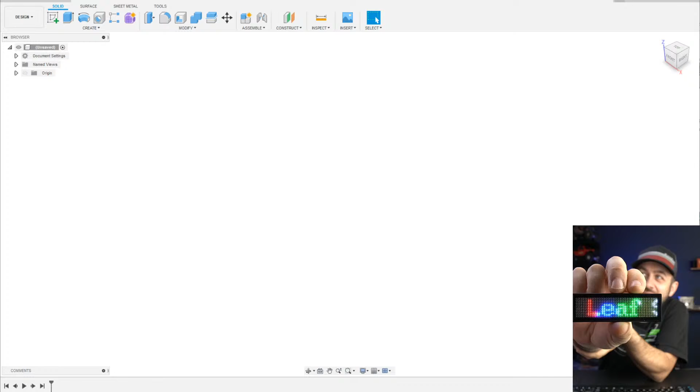And one other thing that I wanted to do. If you guys remember, I had this, it's a digital name tag actually. I had it for one of the Scale Nationals builds, and I was going to use it as my tailgate on the Class 3 build. But anyway, I want to use this as the marquee above the skee ball machine. I linked to where I bought it on Amazon as well. And that's going to be the plan.

Yeah. Constraints are important. So let's get into drawing this thing. I think we should start with the side profile, even though I'm choosing the front plane. So a couple of things. I looked up some basic dimensions of these things.

Normally, these are 10 or 13 feet long, and that's too big for most people's 3D printers to try and make these to scale. So we're going to shorten it, go with a stubbier version, but I think it'll be fine. It'll still give us the look. And then the width, they're usually about 32 inches wide, and I want to make sure that I can fit this as a marquee. So I think we're going to be pretty close on width for scale. Those are a couple of things that I want to keep in mind.

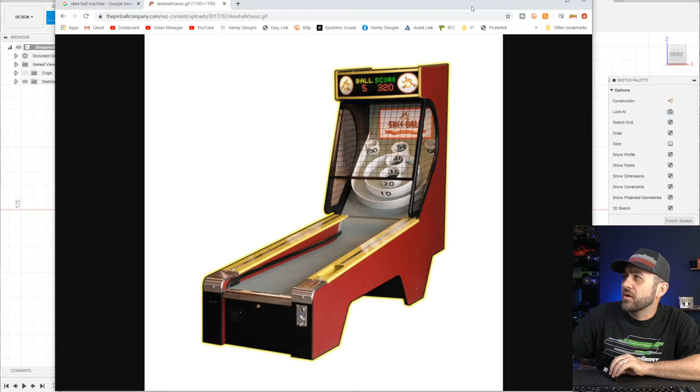Okay, 220 by 220, 225, 235. Okay, so 220 is the one. I want to make sure that I don't have anything bigger than 220. Thank you guys for that. I appreciate it. It's good info to have.

So we're going to start with some constraints. Now, the origin point is important. It's helpful to think about where you're drawing around that, but with a skee ball machine having all these sloped surfaces, it's kind of odd to try and define an origin. So I think what we'll probably do is choose this bottom corner and draw off of that.

So again, hotkeys. I try and call out my hotkeys as I can. Instead of going up here, clicking line, I just hit L for line. So we're going to just start with some basic sketching first. Looking at the photo, making some choices. And again, I'm drawing this too small right now. I can tell already.

What is 220? What is that, like 9 inches? 8.66 inches. Is that big enough? We're gonna make that the overall length, so we can print these entire sides as one piece. So, okay. That is good information.

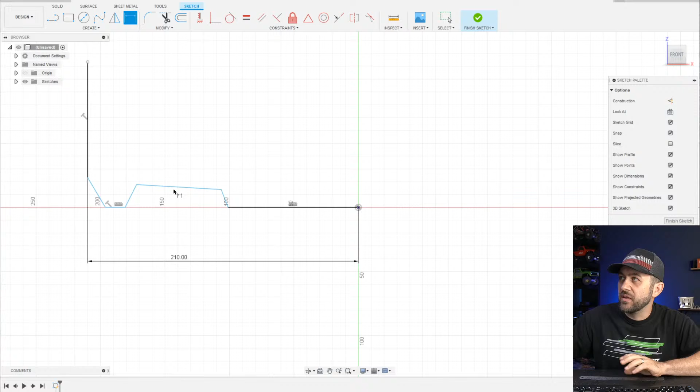So D for dimension. We're going to go from the origin to, this will be the back side. Let's go 210 millimeters so that you don't have to be right to the edge of everything. And so since we have that,

now what I don't know, I wonder if I can find a skee ball machine side. Just going to see if I can find a photo that I like to get the proportions of length versus height, because we can just bring a photo in. Side view. This one gives us some, it's kind of a cheap looking skee ball machine. Oh, what do we have here? How convenient is this photo?

84, what's that say? So this one is 84.125 inches. That's a short machine. Okay. If we just tally up the total height on it though, 15.25, 46.25, 16.25. It's about 75 or 78 inches tall divided by 25.4. Or no, oops, not divided by.

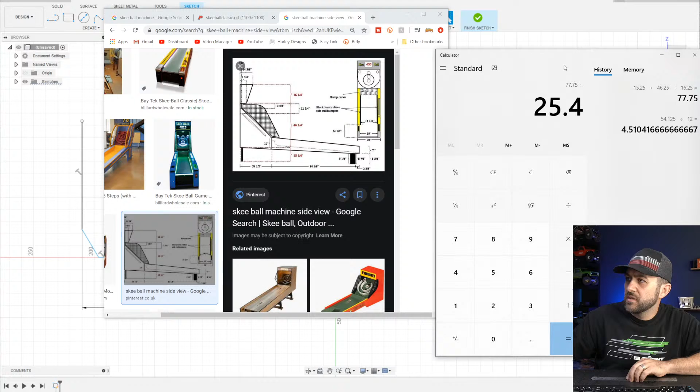So if we take that times 25.4 first, and then divide that by, okay. So the skee ball, 85. Jimmy just gave me the dimensions with the 30 inches wide, 85.5 inches tall. So if we just do, it's still pretty tall. Okay, we'll figure somewhere in there.

So let's D for dimension, grab our overall height, just trying to get us in this range. It looks tall, but let's start with that. If we define our dimensions early, we can always go back and change things as we like. The great thing about CAD, right?

So this line here where I'm drawing, that's gonna be the marquee area. So we need to make sure that it can fit our, so this thing is about 30 millimeters tall. So let's make sure that this here is 45, I think is a decent number.

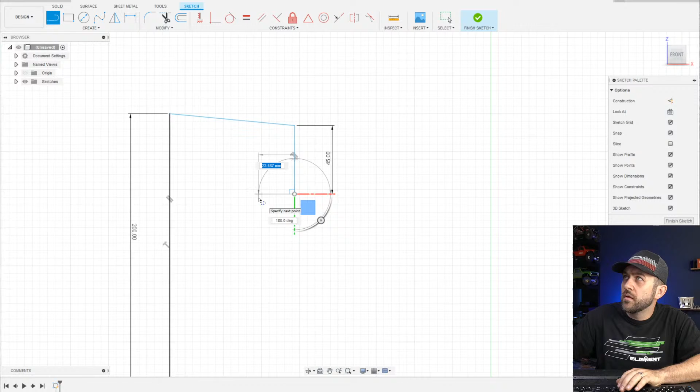So this is going to be our side rails. And then we need an arc. So now I just drew these lines. Now, right here, if I wanted a constraint, I could select these two lines and do a tangent, but I actually don't think I want to. I think I'm going to leave that kind of as a sharper point, and then I'll do a fillet later.

I think we do want to get this closer to the back. This needs to come down. Let's define an angle that we like. So I don't know. The side angle is taller than the actual slope.

Are these designs more geared towards FDM than resin? Generally, they're more geared towards FDM just because those are the more popular and more common printers. And resin printers, most of the ones that are the most common for consumers to have, are also a little bit smaller. So again, generally, yes. I have a resin printer as well, or have access to it. It's the one that we have at the shop, but I use it more for detail type stuff than anything, nothing that needs much strength.

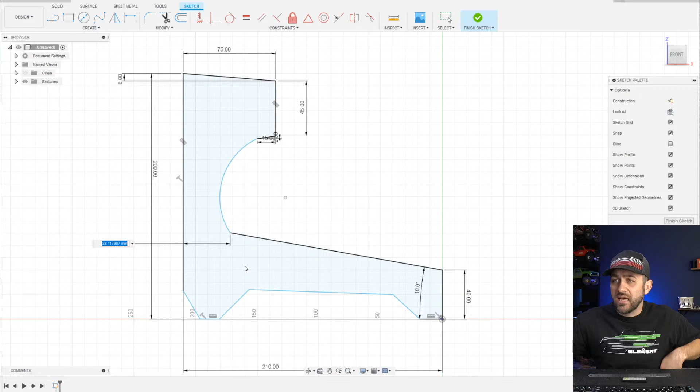So let's try and rein in some of these other dimensions. All these dimensions here, I'm just kind of picking these things out of nowhere. I'm just making a sketch and kind of going with a gut feeling. Oh, I see something I don't like. So I'm looking at this photo still that I had, and I'm just kind of trying to pull some of these.

So we've got the sloped sides of these rails. Then we've got this section here, and I feel like this is a little bit of a straight line, and then it goes into a curve towards the top of that marquee. So I'm gonna do that. And one thing I am going to do is select that arc and that other line, and make those tangent so that they flow into each other. I think that looks a lot better. Bring that back a little. No, I'm going to take it the other way.

How big is that LED name tag? It is 30 millimeters tall, and it is about 93 millimeters wide. So it's going to be a little bit wider than the actual scale width proportions would come down to, but I think it's kind of just a cool touch that you could add if you wanted to purchase it. And if not, we'll just have a panel there that would fill it instead.

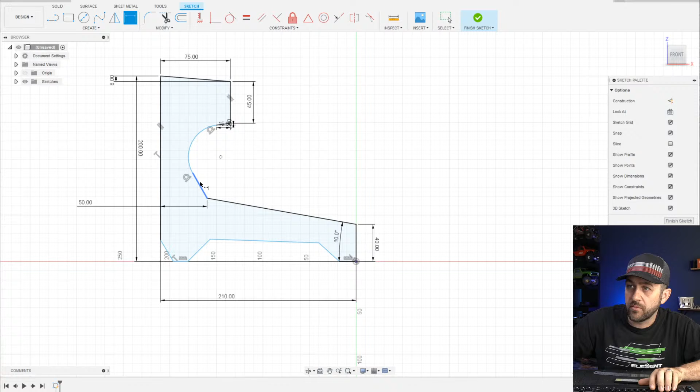So I'm going to make sure that we have a few other constraints. Now, you can see all these lines are black all the way around except this bottom, and that means these are all fully defined. So we have enough dimensions on all of those that it knows exactly where they should be. These ones that are still blue means that they're not defined yet. Ideally, you want all of the lines in a drawing to be defined. So these are blue, so I can still just click and drag them around. These black ones, I can't. I can click and try and drag, nothing happens because they're defined. So always try and shoot for a defined drawing if possible.

We're gonna go closer to 60. Stand that up a little bit more. Do a complementing angle here. And we'll match it on the back side as well. Let's take a look at this. What's 5 degrees look like? This angle here is what I'm gonna make the actual skee ball ramp area, the area that the actual ball would ride on. I'm gonna try and match that. I feel like that angle's a little steep. 4 degrees, I like it better.

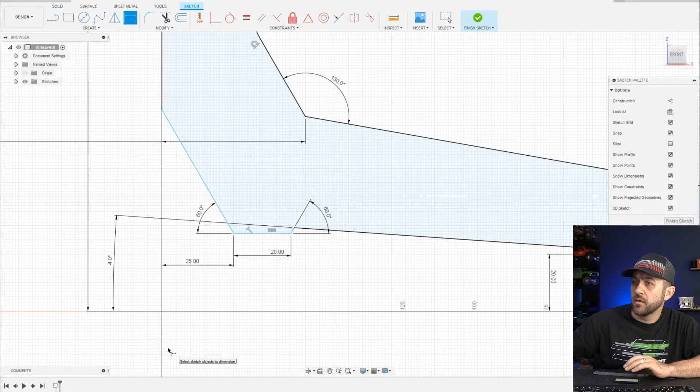So another thing with constraints, now you can see how this line went way up in the air there. So if I select that one there, go down to the front side, select it. Up top, there's a collinear constraint. Click that, and it just means that those two are going to be in line with each other. That's what collinear means.

How about instead of 3D printing scale accessories, we just build a shrinking machine, and with as much time as we spend on here live, it probably would work.

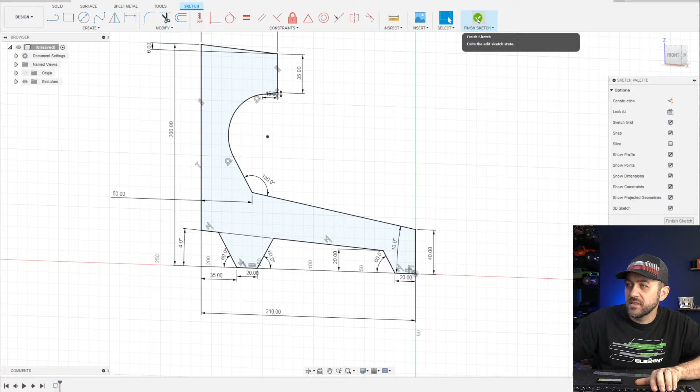So I'm gonna select that. Can I do an offset here? Start, yeah, offset. So the reason I want to do this is I want the origin to actually be in the center of the actual machine. So I'm gonna do an offset here. Like we said before, this piece here is 92, and we added 5 on the marquee, so let's add 5 on the side. So we'll go to 97. But we need to do half of 97, so 97 divided by 2.

And then we'll select that distance. Let's go 2 millimeter. It's not very thick. I mean, it's pretty thin, really. Let's go. I feel like 4 is getting too thick, but let's try that. How many pieces will this be for printing? I have no idea yet. We'll see.

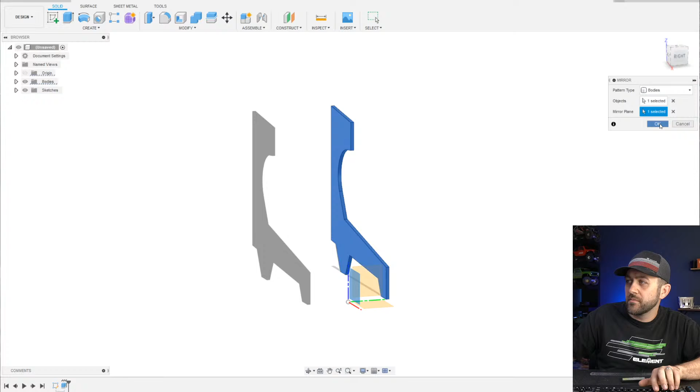So we have that there. We can clean up things later as we like, but this is going to be a start. Taper it. Why would we taper it? I don't see why we would do that. So now this is a body that we'll want to mirror. I don't know if we want to do it yet or not, but let's just do it for now. We can always undo it or change it, but that's kind of what our initial framework will look like.

The reason I say I don't know if I want to mirror it yet is just because I want to add bosses and tabs and things like that to this piece that are going to copy to the other side, but for reference now, at least we'll add it and see what it's like. So here's another thing. Like exactly this. I made this just a thin piece, and we still need to add all kinds of width. I want to add this whole portion, this top rail. I want to try and make this side piece as substantial as possible, and incorporate it, minimize a lot of the extra stuff that'll need to be done or attached.

So let's add, let's go 10. Doesn't need to be too big. Add the radius around the front. I think we can get away with some of it. We're gonna add a new sketch on that side plane. I am gonna turn off that second body. We can delete it, redo it later, but just turned it off for now. So we're gonna flip the offset. We're gonna go 3 millimeter, flip it again.

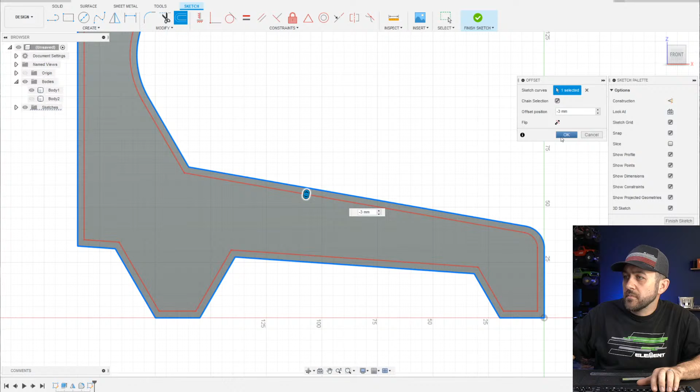And we're going to do from this corner a perpendicular line. How much? I'm going to just bring this to the front for now. We may add more framework later, or we definitely will. But for now, what I'm looking at doing is I want to add this lip. We have 4 millimeters of side already, so let's just add. Let's look. We have to do some math.

So 4, I need at least, say, 7. That's 11 millimeters total. And then I need another wall thickness. Let's say we can go down to 3. So what did I say? I'm going to take that outside from 4 to 3. So 3, 7, and 3 is 13 total. That's what I need for the distance here.

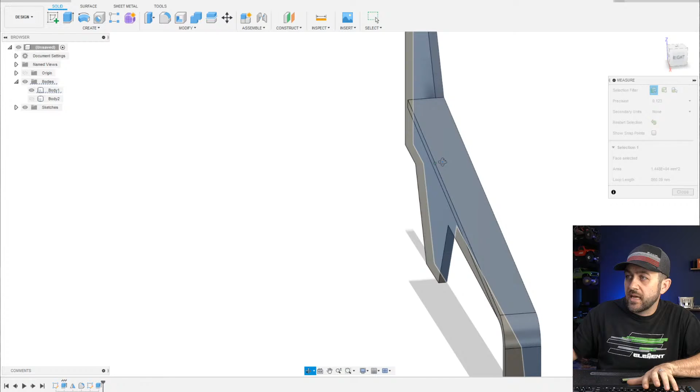We're going to change that first feature to 3 millimeter. And then that extrusion that we did there, I just need 10 millimeters total. And then if we hit the inspect tool, I can show you. So from the outside to this face, you see there's that 13 millimeters we were talking about.

Yes, this is an ambitious project. I am going to try and go through this as quickly as possible. I may have to talk more, read chat less on this one, so I apologize for anybody whose questions I ignore.

Let's just do well, it should be -7 millimeter offset. And we can delete a few of these lines. I could have just projected that and grabbed that, but it's fine.

I'm gonna make that internal shelf, whatever you want to call it, where the skee ball is going to travel down.

One thing we're gonna have to do is it's going to be a little bit difficult to take these things out of here, so we're gonna have to define where this point is going to be. Maybe we can, if we do something like... even, I have another idea. Let's do...

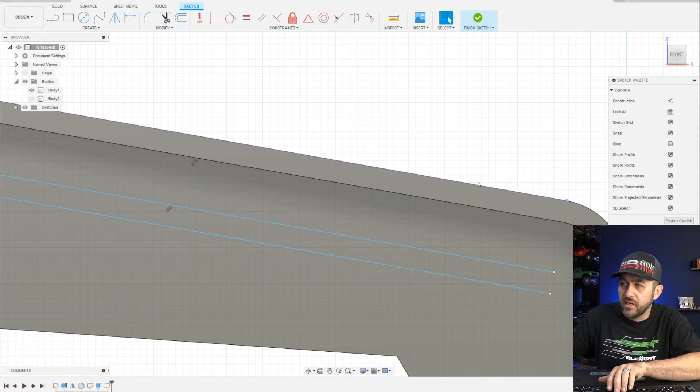We're gonna hit P for project, click that outside line to convert it to bring it in. Now I'm gonna do something - I'm gonna do a vertical line, and then we're gonna do another sloped line.

I'm gonna hit C for circle and draw a circle that is 6.35 millimeters. That's gonna represent what my ball bearing will be. And I'm gonna make that tangent to that line. This is just a construction line for now, so I can see.

I think what I want to do is give this thing a kind of exposed look. So what I just did there was define a 2 degree slope so that the ball bearing still wants to roll downwards, but it doesn't have to be too aggressive. The whole point is this ball bearing will be able to come and expose itself a little bit at the end, so you're not reaching down to get it.

Again, like somebody else just mentioned, this is ambitious. I agree. So let's define some distances from where all this stuff needs to be, and try to bring that thing closer to the end.

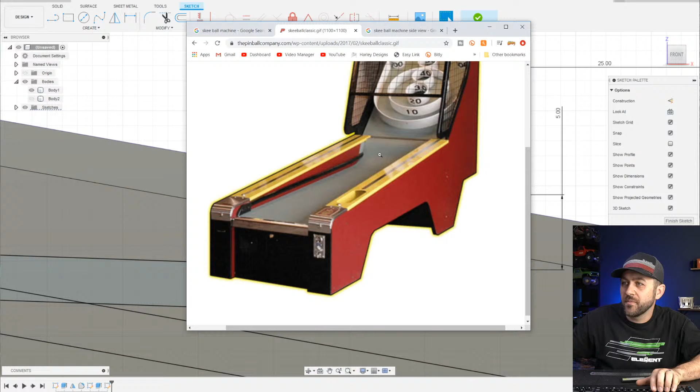Hit P for project. Now I'm just pulling things in for now. We're just going to think and build as we go to try and make this thing functional. Let's see if we get there today or if this turns into a multi-week project.

I think we're going to be able to get it done tonight, but okay, just going to do that.

I'm going to do an offset. I'm going to unclick the chain so that I can only select the lines that I want, and I'm going to offset these 7. Now I can see where technically I'm going to have that interference.

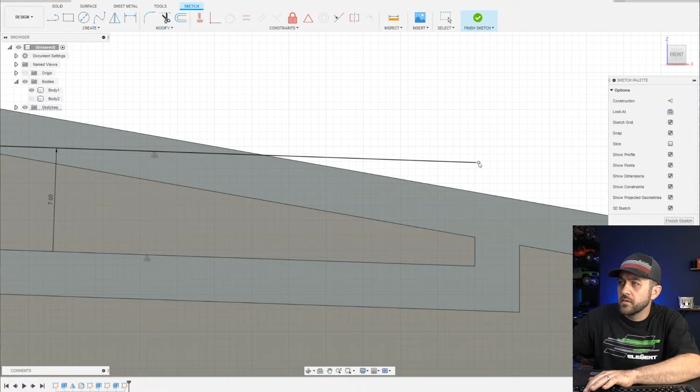So the reason I did that is that now I want to make... oh, there's some... I'm going to make a cut here so that, and we need to make this -10 for now.

So now I know exactly where it was interfering. I can go back in and clean up the cut, make it look how I want in a bit, but that just gives me the mechanics of it for now. We'll work on making the rest of it right later.

We're going to have to make sure that as we're thinking about this, I want this thing to print well too. So some of this area, I'm going to have to make sure people know you're either going to have to print with or without supports, and we're going to have to think about how that's going to work.

So, you know, if I try and close this whole thing off, this small of a gap, it's going to bridge just fine. It's just things like that we're going to constantly keep in mind, make sure we try and get this thing working, functioning properly by the time it's done.

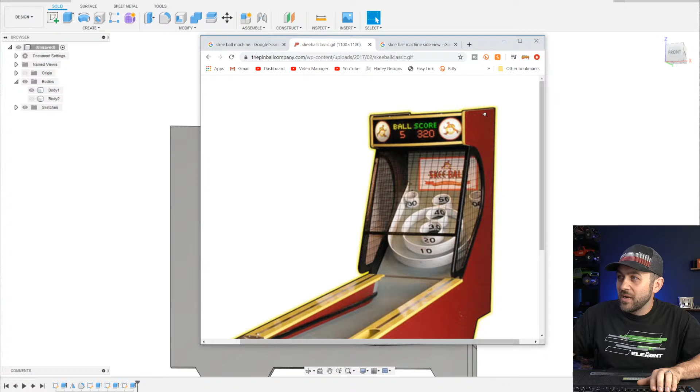So we've got small radiuses on the corners is all, nothing major. We already got that radius. We need to do a couple of these cleanups here, make those feet look proper, only on the inside though. This is definitely going to be a multi-piece, no doubt about that. I'm just trying to keep it in a reasonable amount of pieces.

We're going to clean up some of these corners as best we can. We're going to leave that back bottom one. I can't do it. We're gonna clean that one up too.

Small radii up there, okay. I don't like that one. I can't undo that. There we go. Let's put a 3mm radius on all that.

How deep is the lane? That I don't know yet. Here's something we should do. Let's save it. All right.

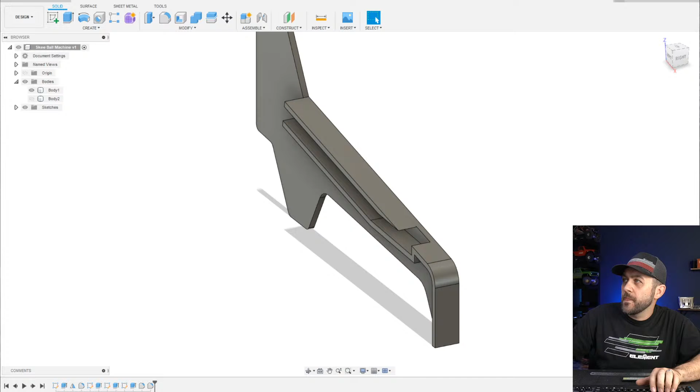Okay, now we need to... so one of the things is like I drew all this internal stuff that isn't on the other side. You don't have the ball return on the left side too. So some of this needs to copy over, but some of it doesn't, which makes it a little bit difficult, but we'll figure it out. We're getting there. Or we will get there. We're definitely not getting there yet. That's for sure.

So, okay, let's work on how we're going to close this in and make this printable. Because that's going to be interesting. Yeah, they don't match. This one I'm not super worried about yet. I feel like we're gonna end up not using that body.

We're gonna kind of copy this one over and redo a lot of it. Can't you back up the drawing and mirror it before? Yeah, I could, and that's definitely something. But I feel like we're gonna add so many other tabs and bosses and all that kind of stuff on this thing that's gonna be some.

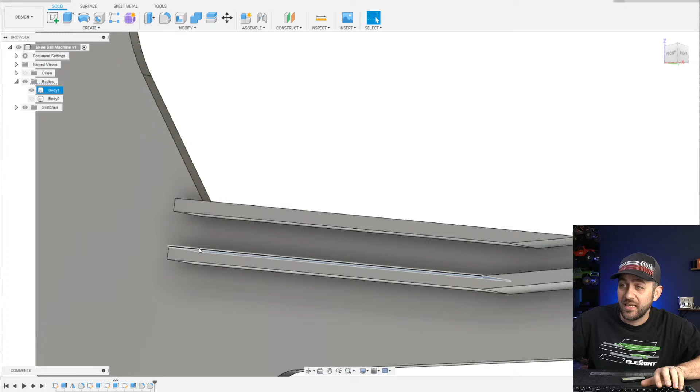And I was kind of thinking about that, but what I'm worried about is the lane's going to come all the way over this, and I'm going to have some area that I'm worried about printing properly. But maybe we can add a couple of additional supports, and I think that'll work.

We're going to try and design this to print as good as possible. And I think I know how, because I want it to print without supports on this so that this ball return stays unobstructed.

So we need the lane. The lane, we need it to start at the very, very front. Let's start it at that radius return. And it is going to be flatter than the top. Oh, and we decided that we were going to make it parallel to this bottom edge here. So we're going to hit parallel. So that does that.

Now you see, we end up with a fairly deep portion of the lane down here towards the ramped section. So I am looking to make sure that we have that. What I'm seeing here, though, is that I think we're way too deep. And that means that I need to increase this bottom angle, which I'm going to hit Finish Sketch for.

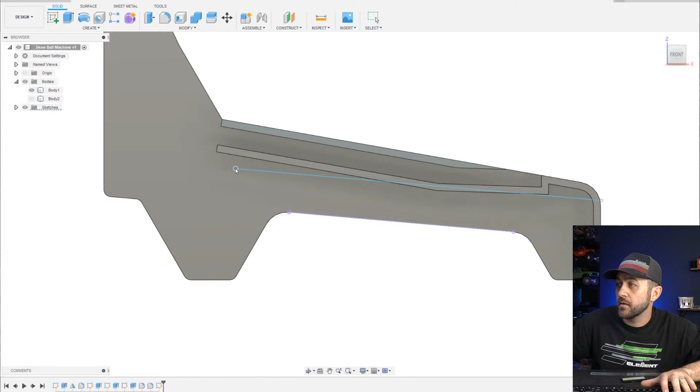One thing, let's just start with something. I still think that that's too deep up here. Don't you guys?

Let's go from 5 degrees to 7 degrees. That's almost looking too parallel. 6, is it going to be all right?

I'm going to hit P for project. I'm going to grab some of that line work. We're going to... okay, I'm just going to constrain some of these lines so that we know we have enough. I think that's looking better.

Phoenix, just fair warning, I'm working on an SCX 3, which may have driven me to drinking.

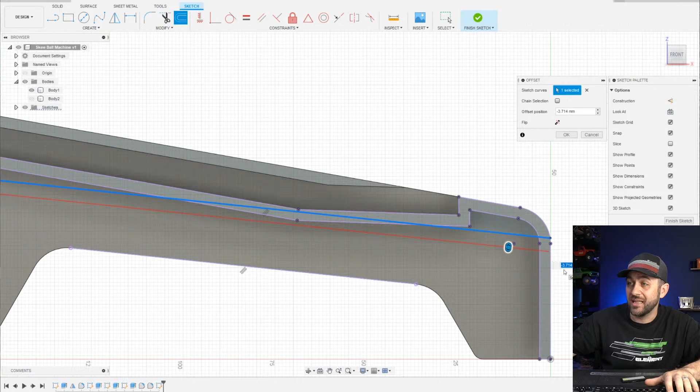So that's gonna start our lane. I feel like we need to make sure our lane has some decent thickness to it. So let's go. Well, we're not actually putting in the full lane, are we? We are just making sure we have a base for it.

So we're going to go -4. Is that going to be 4 millimeters? That's plenty of material for 3D printing. So that.

Now let's start a little bit of the sketching of our arc. I froze. Looks like I'm still moving on my end, at least from what I'm showing is sending. Maybe refresh your feed.

So I grabbed an arc so that we can start looking at the ramp portion. So I drew that arc. Now I'm going to hit L for line, X for construction, and draw a little bit of a line, making sure that it's tangent to the end of that arc, because I want to see where we're going to be throwing the ball bearing into.

The ramp on the actual skee ball machine looks pretty abrupt, but we're going to define off of this random point out here where the ramp portion's starting. 15, and then...

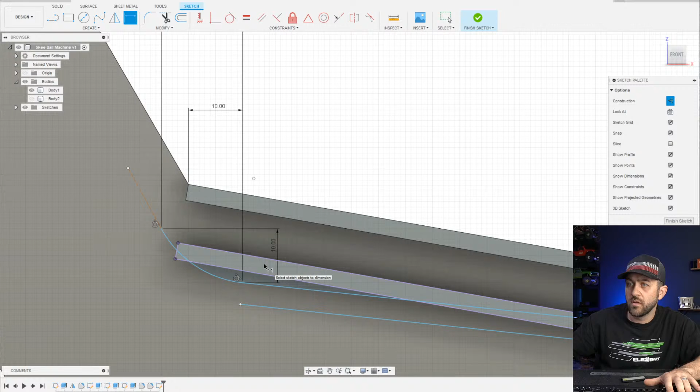Throwing some dimensions on there. That's just going to give us something to work with at least. 33, is that enough? Go up. Throwing the ball bearing to the moon comes to mind.

All right, we're going to be, I think that's looking pretty okay. Yeah, I think we're looking all right at this point. Now, again, this is looking a lot like what the whole ramp section is going to be, and maybe I'll use that a little bit.

Yeah, maybe we're going to extrude this as the ramp section for now, and I'll show you. You need to make sure that we have all the areas we need selected. Oh, let's...

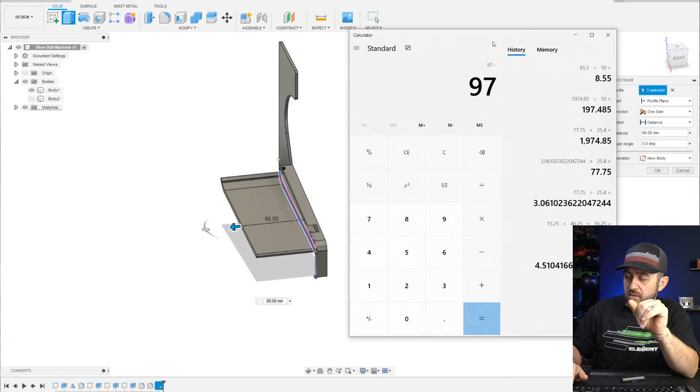All right, we're going to leave this as a new body. We're going to expand this. Now, we had defined our total width previously at 97 millimeters, I believe. So we were at 97 millimeters, and then we were going to have 13 millimeters per side rail. So we need to subtract 26 from that, which means we need 71 millimeters on the inside portion. So let's just go 71.

And we're going to say new body for now. One thing I'm going to do, oh, see, we missed a portion of our profile.

It curves up at the end of the side rail, it curves up at the end of the side rails. See the picture. Curves up at the end. Yeah, I see what you mean. You're saying, well, it kind of ends towards the end of the side rails, which is similar to what we have, but...

Oh, sorry, I don't have that up there. You know, like it kind of ends prior to it. So I do see that mine's a little bit past that, but we can possibly adjust that, but we'll see. This is all kind of loose at this point.

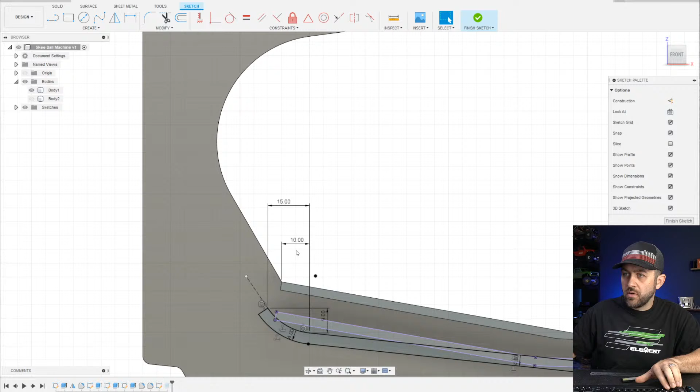So I mean, if we want to go like, whoops, no, wrong one. We need to take the, say we want to do that one and move it like 15. I know it kind of goes higher as well, which, let's go 18 millimeters. And then we're going to convert this from a construction line to an actual line. Get rid of that then.

And then yeah, it's got kind of like a rollover as well at the... so let's see. This line, let's play with some things here. 20.

So we'll take that to 24. Can we push this to 16? Yeah, pretty close. Okay.

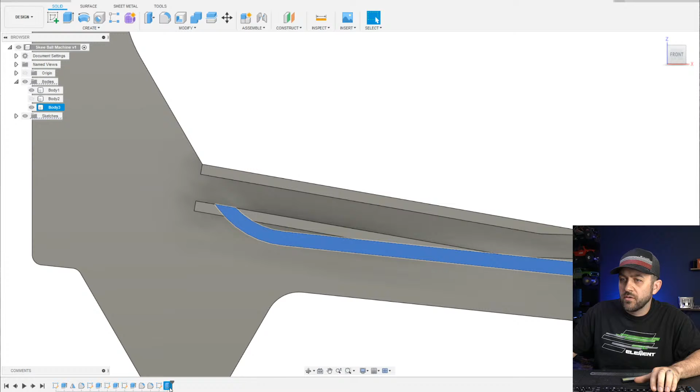Let's see if we remove that dimension, we can just constrain that to that point and we'll kind of make it. Well, we got to make sure we go back and reselect all our points. Everything else is captured. We got to redo some stuff down at that end, but we'll do that.

I'm going to hit A for the appearance menu, pull that out, and we're just going to go to plastic, and I'm going to throw a different color on that center section, just so that we can tell that it's a different body. You can kind of see where we're working with. A lot of this is going to get changed here. It's just, this is where we're at for now. So, and again, that was the A key to pull up that appearance menu.

All right, so that gives us a start for where we think we're going to put that. Now, one thing we need to do is we need to go add some stuff to this first body. We need to make sure that we can support this, what that's going to, or where that's going to be. So let's hide that body.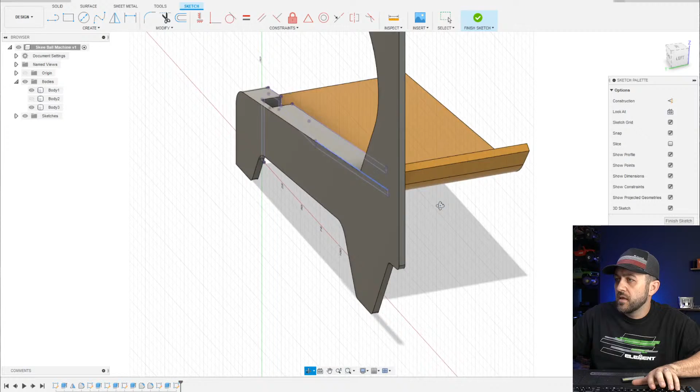We're going to hit P for project. We're going to select all those contours, so we make sure we grab that. And then I'm actually going to turn that body back on, and we're going to try and grab P.

So I'm going to turn off all the bodies. So all those, I hit P and then grab that line work. So it shows me where all those faces are when it's projected to the surface we're working on. And the reason I want to do that is because I want to make sure that I can enclose all of this stuff, but have plenty of walls for everything to close everything in. So I did that at this point, and now I'm gonna just close in the ball return portion here. Oops. So that.

So let's just exit the sketch. One thing we need to do for sure is edit this sketch. There's a couple of areas that we need to close in. Finish, go back, do an extrude. So we know we need to close in that area, but I want to also make sure that we have material under all of that. You need to close that area in. And do we need that? Let's just grab it for now, just in case. I left this little slot open, but I don't need to. We should just grab it.

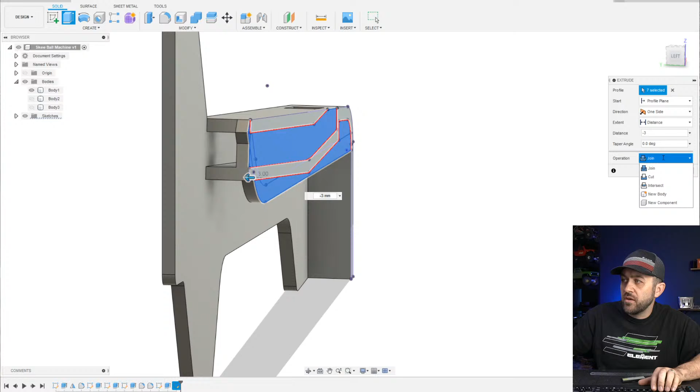Okay, so now we're going to extrude that 3 millimeters. I need to make sure that it goes the other way. Let's do -3. Now, we have to be real careful. We have multiple bodies going now. So rather than do a join, I'm going to do new body, and then we'll join it ourselves. So now it's created that. Now we can just do a combine. Oh, see, we got a hole there. So we're going to select those bodies and combine it with that side piece. Now, that's going to be our ball return slot. And that should be fine. It's going to be able to print that without any support.

This stuff here, I have different concerns about. What we could do is, with that surface selected, we can get a better look at it. Select that surface, do an extrude, and we'll pull that and see if we do a join, if it acts right. Yep, everything's still separate bodies. So I did that. That's going to make sure that everything has a good place to sit. We'll probably add some bosses to screw everything together.

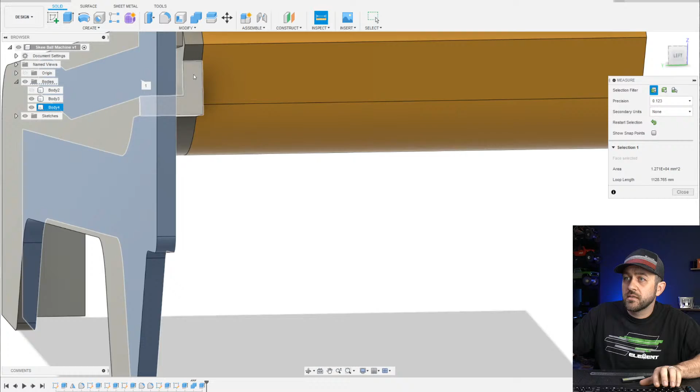Double check the return slot width. We can do that easily with the inspect tool. Select that face, go over, select that one, and it says the distance is 7 millimeters. So our math checks because the ball bearings I selected were 6.35 millimeters or 1/4 inch. So I think we'll be good. All that should be no issues for us.

Now, one thing we need to do is this whole front piece here needs some work. So these sides, or the front of the side, I don't know what we're calling it yet. It looks like it goes all the way to the edge. And then that center section sets down into it slightly. And that'll also help with being multiple pieces. Our seams, whenever you try and make things just match perfectly, they're never exactly right. So when they're offset, everything just looks better, looks more appropriate. So let's do a little bit of that while we're here.

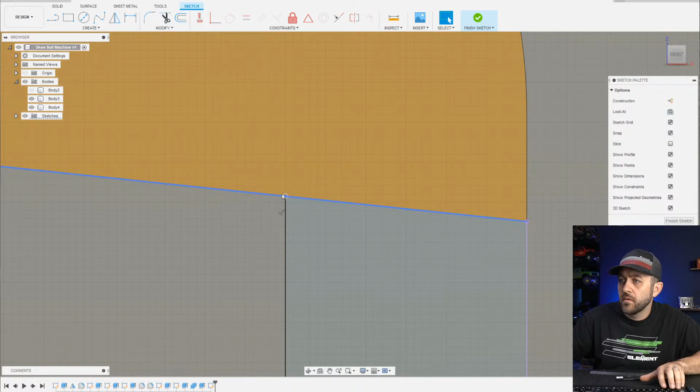We'll draw off this outside face. I think we'll just keep it to the inside, set back about 3 millimeters, and then we'll go back and add some support to make sure it sits well. So we can throw a radius on it whenever we like. I'm just going to grab that edge with the project function, and then I'm going to offset it back. Let's just offset it back 3 millimeters for now. Make sure that it's closed. Just need to make sure that it connects up. We can grab that surface if we'd like. That's a very simple area we're adding.

We want it to go all the way to, we're not going to do a join. You can see when we get there, it's trying to join. We're going to do new body. Now you can see it stays separate. We're doing the combine function, combines those two. It did lose our appearance, but we can just throw it. Whoops. It just did it as a face. Or did it? It didn't combine bodies, did it? Nope. Still good. There we go.

Can you glue your PLA together, or whatever filament is common for this, to make it quicker in design? You can, but I hate when I have to rely on glue. I always like when it's mechanical and, you know, we deal with hardware and things. I just feel like it's a better design. Threw a little radius on the front there for style and grace.

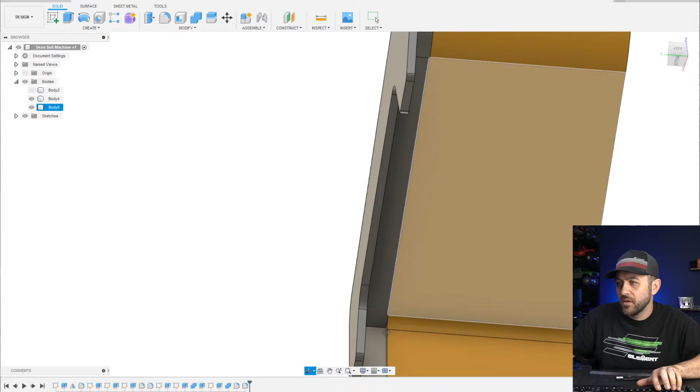Radius on the inside. Now there is nothing out here that it would sit against yet, but I think we will knock some things out there. Not too concerned.

Pinball machine or Pac-Man arcade game next? Who knows, maybe. I think next time we'll go back to some sort of more traditional RC accessory before another wacky one like this.

So, okay. I feel like this is good enough now for what we've got started, that we can start looking at the back portion, where the actual game is, I guess you'd call it. So let's start a sketch on this plane. Now, what we want to do is probably start from, I'm going to hit P for project, grab the ramp surface so that we know where we're starting from.

And I think that we're going to carry this back quite a ways. It needs to set down, because the skee balls usually come down into an area and then find their way into the return. So we're going to have to make that happen. With the rest of the idea of a skee ball machine, we're really going to have to think about the mechanics of it and all that. I've got the

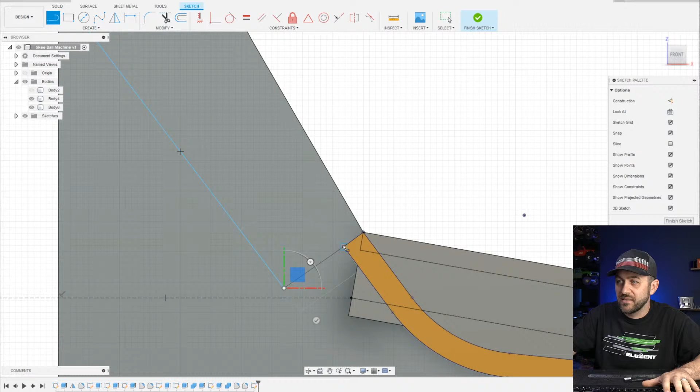So we are going to assume some sort of area, because then there's going to be basically a vertical face, a face anyway, that's going to have area for the balls to go into, with the ones that you miss, which I just remember that because I obviously

like many sports, skee ball is not my finest activity. Yeah, there was a lot of that's what she said in that whole thing. I am aware. Let's see.

We're gonna start throwing some things around here, and then we'll refine this, because this is one of those things where I don't know 100% what the design is yet. We know that there's going to be a back wall, so we'll figure that out, where the return is. Let's just get something in here and then start figuring out what is wrong, what needs fixed, what we need to worry about. If we need to start adjusting things to pull things forward, like maybe we need more room in this area. It kind of feels like maybe we do, but we're gonna figure it out as we go.

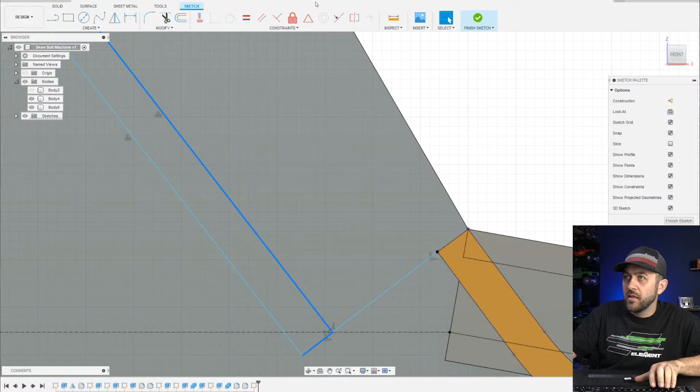So we're gonna make sure that these two, we're gonna put a parallel constraint. Oh, it didn't need it just because the lines were already parallel, so they were automatically, well, just because they were the ends of both of them.

We're gonna take this, and so while the other portion was on that, what did we say this was again? 93, 90? We were gonna go 93 plus 5. Was it 97 or 98? I think it was 97 total width on the inside. So 97 millimeters, new body. Just for now. This is definitely too short.

I feel like we need to go back and make some modifications to this rear portion to give us more depth. So we're gonna go back to our very first sketch and adjust things. And now if we constrained things properly and gave ourselves enough room, we're gonna adjust this and it should adjust everything. Probably gonna go back and have to change a few things. So we have 50 in here, we're gonna go to 70.

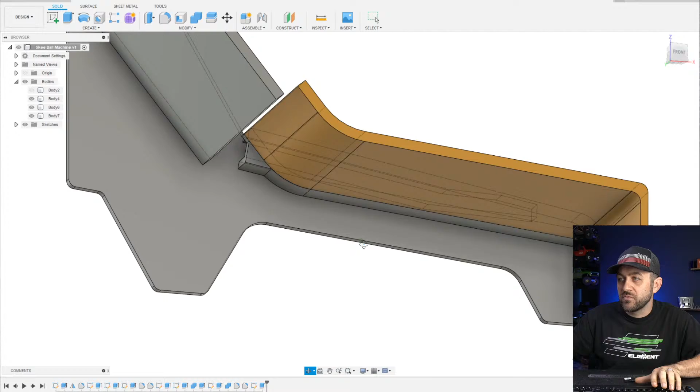And, oh, did it? It looks like we did a pretty good job. It looks like almost everything moved with it as needed. And I think that area is going to be a little bit better. But the good news is that everything moved with it. Everything feels right. Doesn't look like we lost anything. So, great.

Now, to be able to think through this, I'm going to sketch on this plane. And we're going to form a construction line down the center.

And we need to put a bunch of circles on this. Here's our midpoint. So we're going to put one that's most of the width. That'll be our largest one. And then what we need to make sure that we do is that we have room to fit the ball bearing between them. So let's make sure that the difference between these is, let's give ourselves a little bit of room. Let's go 13 millimeters.

That's not a ton of room, but it's a little bit. So if this is the 10 ring, the 20, that would be the 30. I think that'll work. So we're going to be able to expand that out. That's 60. Let's go 70 on it. And change these from construction to...

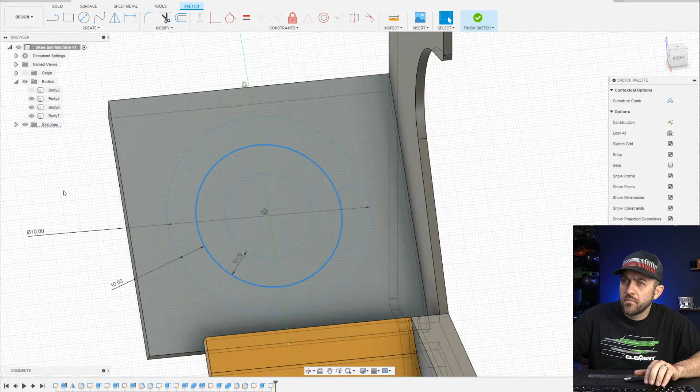Oh. I don't know why these will not change. Weird. I don't know. We'll figure it out. Oh, we also need to make sure that we have the thickness of these. So 10 is probably not going to be enough. Because we're going to need, say we do 3 millimeters of wall thickness. Yeah, probably not going to be enough. Let's figure that out.

And we'll need the actual center. Is that right? 10, 20, then 30. Oh, yeah, actually, that is correct. Okay. So the inside of the innermost one... That is good. So let's go 13 millimeters on the inner. That's basically twice the size of the ball bearing.

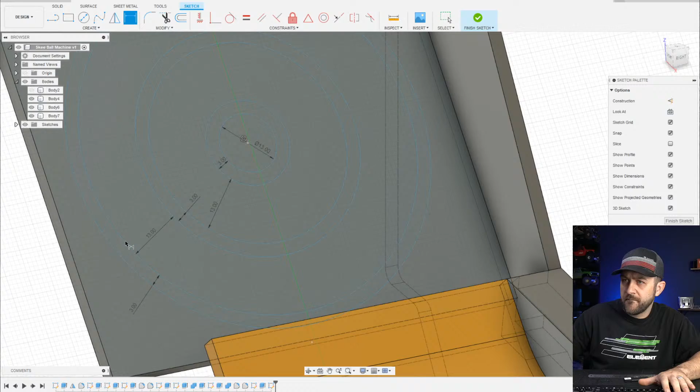So then we need to have the vertical lines. And we need to mirror those. Why these lines don't want to select. I feel like this whole sketch is acting funny. It is.

Edit the sketch. We're going to try and see. It does not show that these are a construction line, but for some reason, it still shows, kind of funny. Good call on hiding the body. I don't know why it was doing that, but turn it back on just to project that outer edge at least, so I know where everything's at. Select the objects. No, see, it still won't let me. So bizarre.

Wouldn't it suck if you lost? Let's go ahead and save it just since you jinxed me.

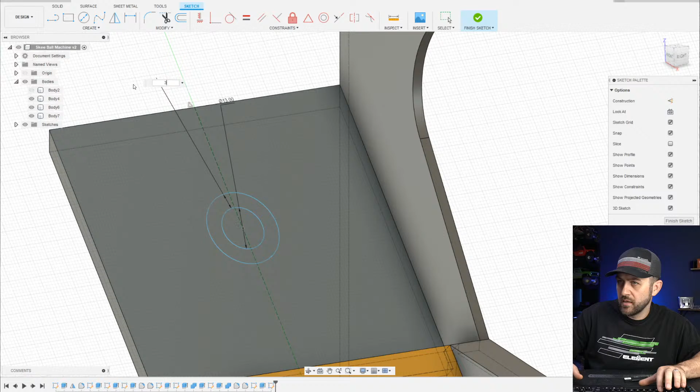Hmm. This is very odd. I don't know the best course other than we're just going to try and start over on that. Just delete that sketch, try it again, and see if things act better, now that we kind of figured out all the difficult stuff. And we're gonna try the simple stuff before we go all the way through it again and see if it doesn't work. So let's just do a single 13 millimeter inner hole with a 3 millimeter wall thickness. See if it's gonna work now. So I feel like we're gonna be all right.

Okay. So now we're just gonna go back, edit that sketch, add the rest of the stuff. So add the 13 millimeters between them. Make sure that's on the center point.

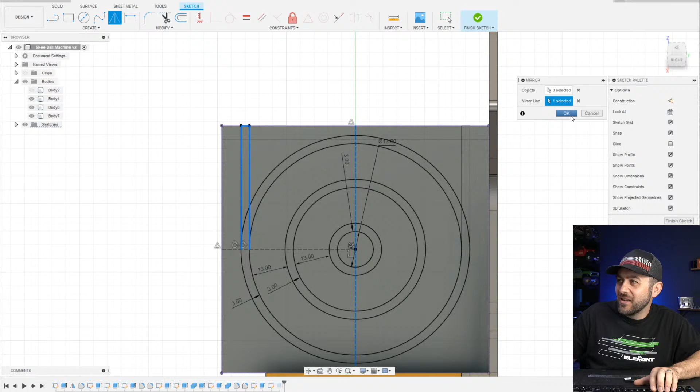Okay, there's the basic part. We still need to add the secondary ones and the corner, you know, the higher bonus options. You know, we got to put the ones up in the top corners, and these extra two. So let's get those done.

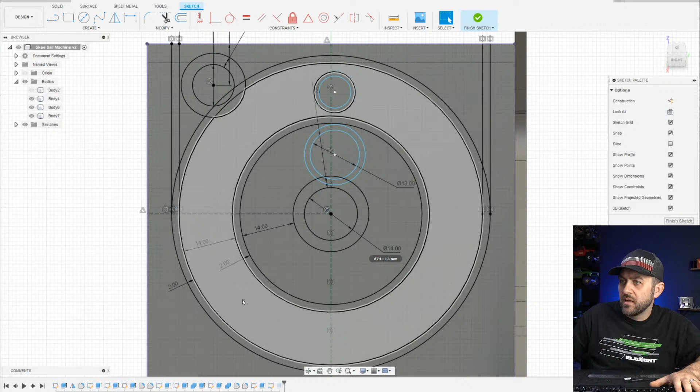Let's see. Where's my call out on that? Oh, right there. Just thinking, trying to give myself a little bit. I'll still make that center one 13. I make that 2 millimeters. I still need to make these more than 14. 16 still doesn't quite get it. Those do normally go all the way to the edges.

Oh, maybe is it just me, or is that one in like the 30-point one? Is that not centered? These two aren't actually. Are they maybe not centered?

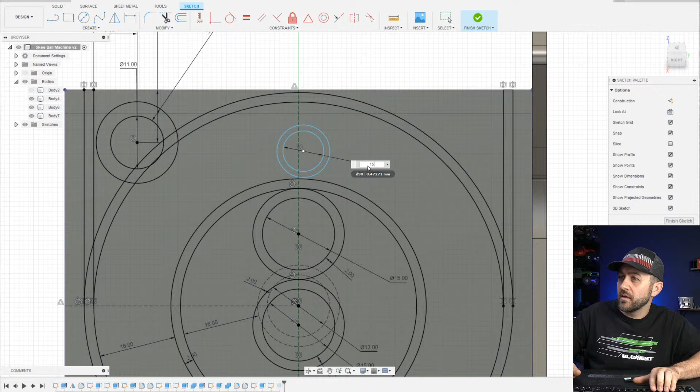Aha, there's our problem though. I'm slightly out of height. Yeah, we were so close. Let's see. Maybe we can fudge this though. There we go. Perfect. We just took that down to 15 because I'm not actually using that inner one anymore. I think we can cheat our way through this setup.

Oh, and I need to mirror that one. Oops. I had that at 11. I made the other ones 15, so we'll just make this one 13. Now let's mirror those 2 objects. Finish. What did I select that freaked it out? Hit cancel before I screw something up. Try it one more time.

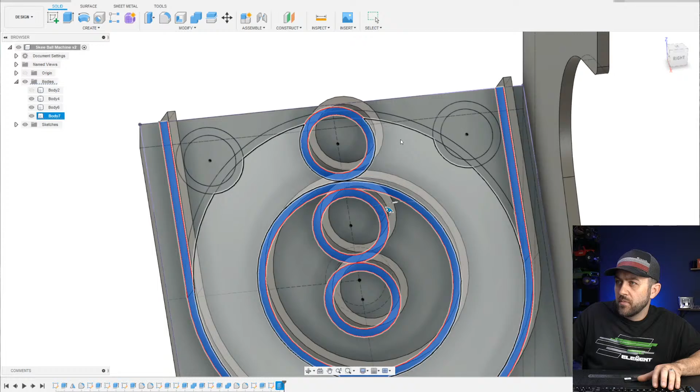All right. Now we're going to hit P, select that face. Oops. That's not what I'm going to do. Edit that. We're going to delete that. Sketch, select that face, and now we're just going to click all of the inner portions that we need to knock out. At least the start, and then we also need a circle in the bottom of this one because we need somewhere for that bearing to fall into if it falls in that area.

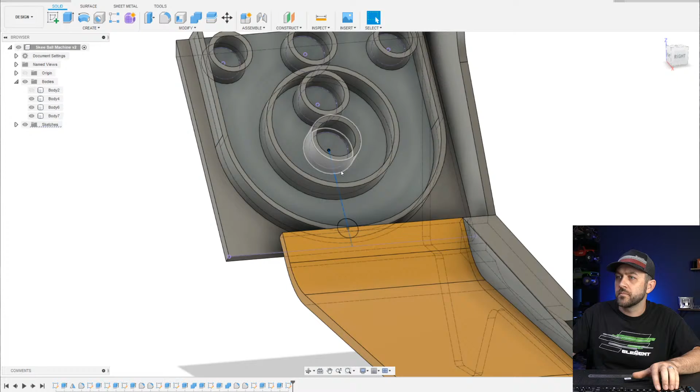I can just do 8 though, and then I'm actually going to make it not tangent to the top, but tangent to the bottom one, because I made that an 8mm circle, but the ball bearing's only going to be just over 6. And again, we're not worried about arcade reliability here, right? So now we're going to select all of those and we're going to cut them through. Okay.

Trim that top arc out of there. No need for it. Oh yeah, I could have on the lines. I just didn't. I think he was talking about the tops of those arcs, and I could trim them out, but since I wasn't using them, it was just extra steps I didn't do. I just needed to realize that while I was drawing, so I didn't think about it anymore.

But let's change our visual style for just a second so we can see what we're working with. Currently, we can see that bearings coming out of here are going to be a little close to the back side, so we're going to have to think about that and either adjust or allow for some fudging on the back side.

Need one more hole. I'm missing a hole. Oh, I see exactly what you mean. Good call. So we'll make those tangent to each other, and then we'll make this and this equal. Select that circle and that one, hit the equal constraint. Finish the sketch, go back, edit the feature. There we go. Good call. Looks pretty close.

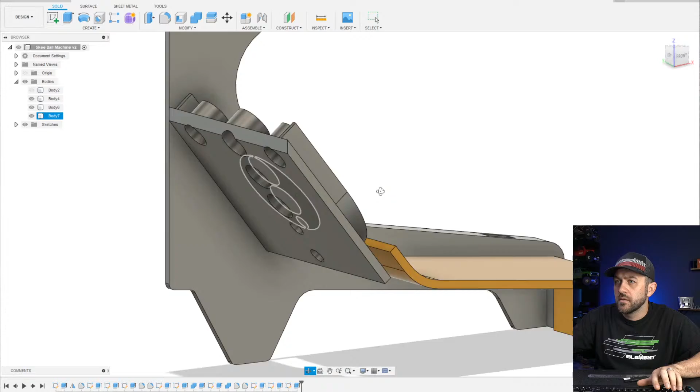I like that. So now we need to worry about ball bearings that come through. They actually have to make it back, right? Now, the other thing is that we need to make sure that we can actually hold this piece into the machine, right?

Because right now, I don't want to print it as part of the side. I want to print it as a separate piece because I want to print it with this piece laying flat. So I want to make sure that that's the lowest edge. Everything else is going to be kind of above it. But maybe rather than adding too much to it, we can add some bosses on the side piece to help hold it. Maybe it kind of sandwiches in the end. Maybe we do rely on a little bit of glue or something like that.

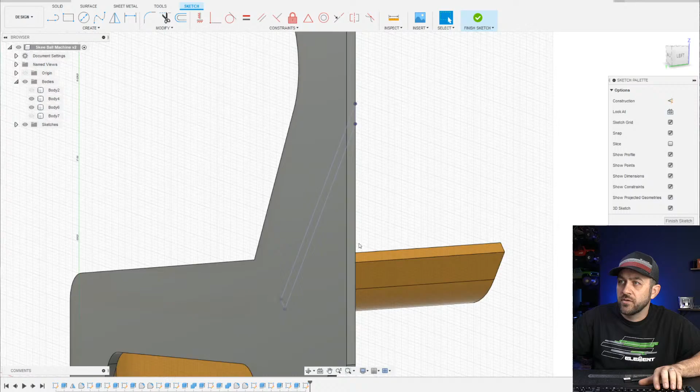So I don't want to add bosses on the back to screw in on this face, just because, again, I'm kind of worried about appearance, and I want it to print easiest too. So we'll add some bosses on this side piece real quick. They're not bosses, but kind of like a channel, we'll call it for now. So we selected that face. Let's hide that body, but grab that. Now we'll turn that body back on and turn this one off. So now we know where it rests against at this point.

And I'm going to offset this bottom line. Let's see. Well, actually, we have a couple of options here. What did I make the thickness of? Pretty thin. I don't want to cut into it. I was gonna say I could make some slots in the side, and actually, you know what? I still can. So maybe we're gonna do two things. First, we're gonna take that and we're gonna go negative 0.5. So we're gonna cut into the side of that 0.5 millimeter.

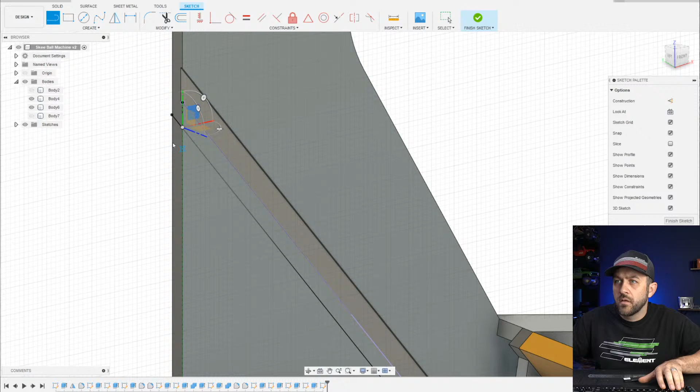We're going to go back and extend that thing 0.5 millimeter on each side, and that'll help. Then it'll key into that. So that helps retain it. And now we're going to project those two. We're also going to offset them -3. Do that. Now let's just close it up. Right. We're going to take that out 4 millimeters. We're going to say new body for now, just so that nothing gets confused. But we're going to go ahead and join those two.

So, done that. One thing we need to do is, I'm going to go 0.3. I don't know why I just did negative. Negative 0.3. We're going to do new body though, just to make sure. Well, before I do that, let's mirror that body. Mirror that around what will be the right plane.

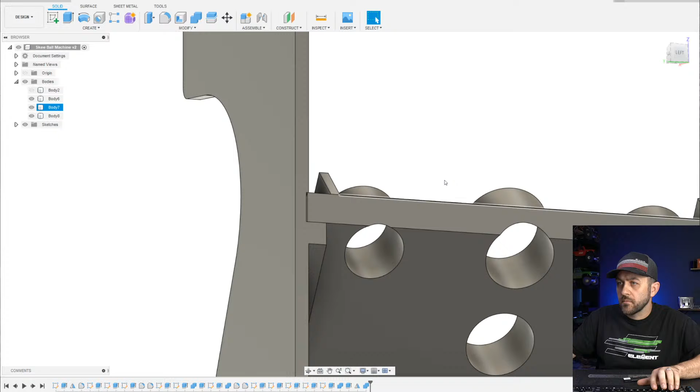And so technically we should oversize the slot a little bit so that it kind of fits in there better. Some of that stuff maybe I'll do before I upload, but for now, at least, for the purpose of this video, we need to just keep moving. Okay.

Remember when you thought this would be fun to do? Right? Yeah, because we're burning some time.

Now, I did have that other side over there still, which I don't really want. I'm going to delete that for now. What I am going to do though is we're going to mirror this one. At this point, it's just kind of again for visualization, because I want to see things like this. See how I don't have a measurement right? We need to correct that.

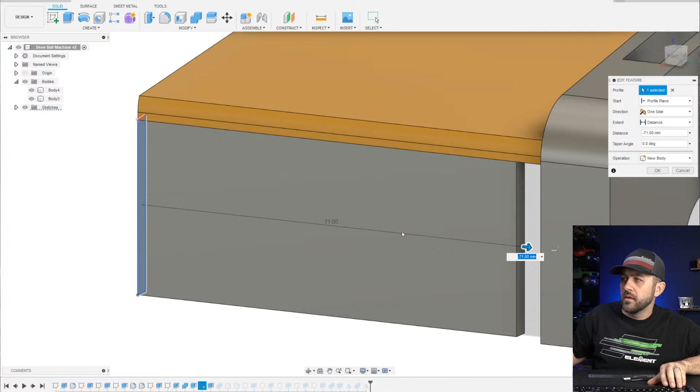Let's see, where did we, it was that one there. 71, I think, do I need 74? No, still wrong. Let's do a quick inspect from that surface to that one. 77 millimeters is what we needed to have. Okay. This is another one where what I should maybe look at doing is an overlap, and I think that some of that stuff I should do. See down here, what I needed to do was make that more dimension driven. So now no matter when I modify it, it should fix it.

So, now while this one has a ball return in it as well, it's not going to be needed. "Hope he realizes the balls are going into the outside of the cabinet if they go on the top." I did mention that, and that will get fixed. So we'll figure out how. I understand that these are too close to that back edge, and technically they would come past. So we're gonna fix that, or possibly just add a bit of compensation out the back for it, but that's okay. We'll get there.

Okay, let's make some room for this marquee.

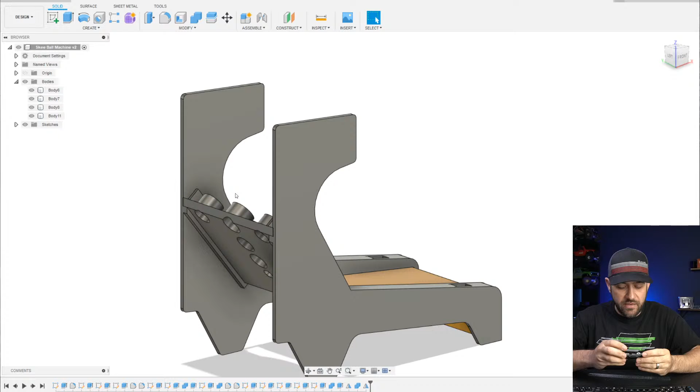But anyway, still onto the marquee first, just because we're going to try and make this thing look right. Closest makes no difference, 30 millimeters, 29, 30. So we're going to turn that off, that sketch plane.

I'm going to make a construction rectangle. We're going to dimension it at 30 millimeters high, and the width of the face is 6 millimeters, the width of the tag.

Final design, I want to be slightly inset from that front face, say 1 millimeter, exactly. One thing I'm going to do is a little construction line from the center point of this one to, just going to click on it somewhere, then add a center point constraint. So now it's made that, then I'll make this horizontal. That way it's centered properly in that face.

Okay, now what we're going to do is grab these face features around this portion, about like that. Turn off construction. We're going to go inset 3 millimeters, flip that inward. Let's go negative 2.5.

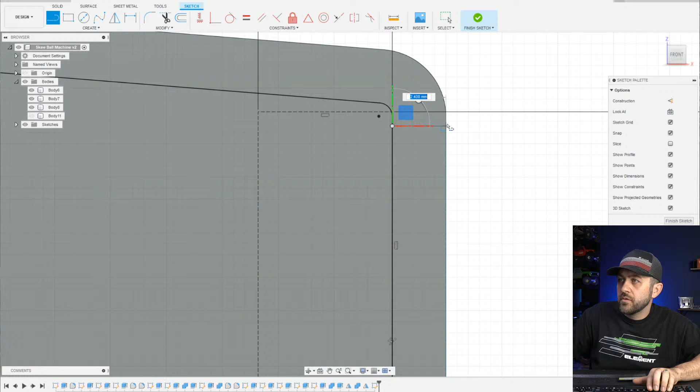Yeah, that'll do. We can go 2.4, and then that'll be a proper amount for a 0.4 millimeter 3D printing nozzle. So let's delete that. What I'm going to do is move this so that it's basically collinear with that inset face, which will be fine. And then we're going to draw a couple of lines like this.

Now this thing has a bezel around the edge, so we can kind of overlap that and make it look pretty good. We could do 3 millimeters pretty easily even. So we're going to dimension from the bottom to this line I just drew, 3 mil. Same up here.

That'll also give us an area to attach to. I think a little bit of adhesive tape of some sort, some shoe goo or whatever, will give you the ability to attach there. Now I feel like we can just do that.

Maybe we're going to come down here just a bit for some reason. I don't think I grabbed that line, but we're going to. So now, that's kind of my sketch that I want, at least.

I think I know what we could do. Let me look at the total thickness of this with my... Well, I'm not going to touch this in the center, I don't think. So yeah, it's 6.26, so super close to 1/4 of an inch.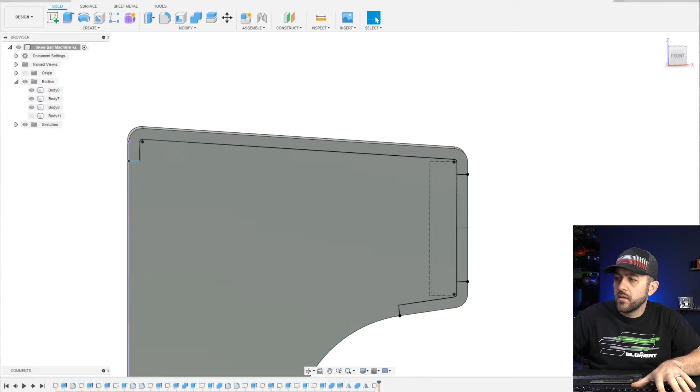Let's add. I'm basically going to make some... undo that, just draw a line. Make sure both of those are vertical. That's what was going on. 2.5, and then we're just going to make sure that this area is canceled.

Oh, let's check something, 6.7. Okay, so it's got enough room. I think we're going to be able to grab some adhesive tape in there. The reason I want to do that is because this is going to be its own piece, and it's going to become the center piece of this.

That's far too wide. We decided this whole thing was going to be 97 to the inside. Is that correct, inside to inside? And new body.

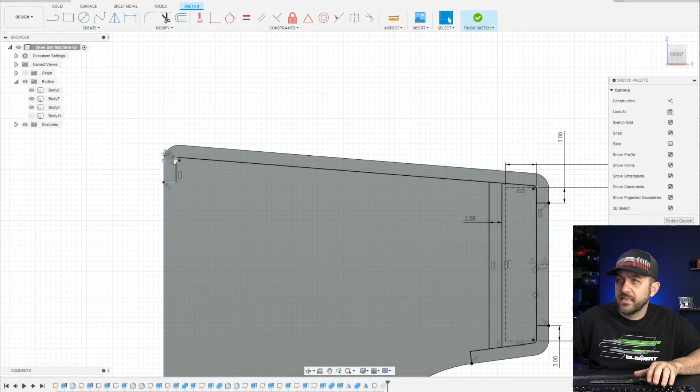It won't do it. Oh, because of those. Let's see, that's why. Just going to get rid of some of these radii, and now we'll just define these on our own. Oops.

3.4 there. This we're going to just take to... oh, there it is.

We're going to make sure that we have enough. That's 7.

This will make more sense in a moment, but I wanted to move this in so I could inset. See how this is like, it's not at the edge everywhere, so it needs to be pressed back in slightly, and that's what I'm trying to make sure that I get done. So I'm pushing the inside portion in.

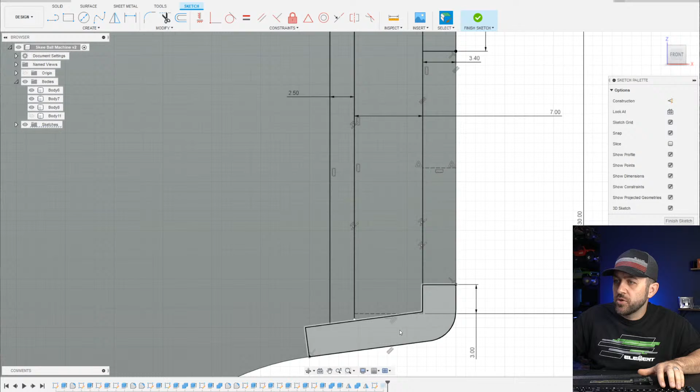Now you can see this rectangular portion out here that's not inside of that. We're going to have to make sure that we make a little bit of room just because that is the size of our digital name tag.

So we're going to do an... oops. We're going to offset again. Grab all of these points one more time, and we're going to go at negative 1 millimeter. So that's going to create our new inside portion.

Now I need to redo, oh, that's the other thing. I'm going to change a couple of these construction lines to profile lines so that I can use them. So making that cut out. Oh, missed one there.

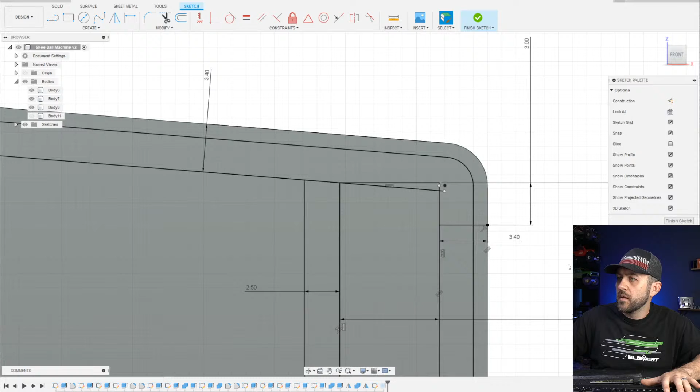I don't know why it won't let me select that one. We're getting close, I just got to fix that one portion there, and this will look much better. So I got to fix that top portion, and we'll be in business.

This is why, this one back here is not. So I think now that we found why that profile area wasn't closed, yep, now I can deselect that. So now that piece should be able to properly hold everything.

And it looks like everything is still separated. Looking like a skee ball machine, right? All right.

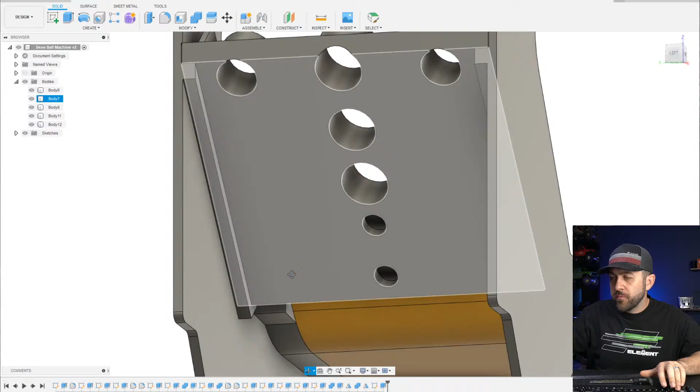So we have to create the fencing part of this too, but we should really focus on the function first, because we need to get the balls back to where they belong.

So change our visual style. Sorry, I ate a piece of ice and I realized that.

So first thing we need to do is make sure that we have even - I'm going to make sure that this line is, so here's our horizontal line, that's going to be a construction line. And make sure that we have at least a 2-degree slope on everything as a minimum.

Which is it going to be possible? Oh, it's not showing me the part where that comes out, but we'll check. Hopefully so.

So we're going to extend this, we're just going to take it all the way to the back. This is not going to be fancy, I feel like, on the back side. I'm just going to try and get everything into an area and then roll to the return. Fingers crossed.

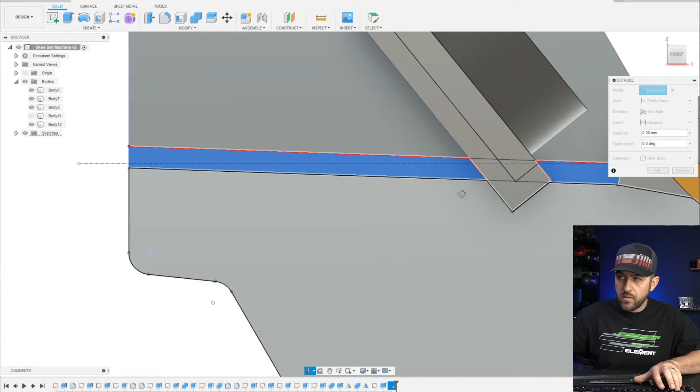Now let's make sure these are parallel. Now let's make sure this goes all the way over to that point as a new body.

We'll be able to see where all of the interferences happen. So, oh, good news. Okay, so you can see there's a little bit of an interference here. Now I do have a 2 degree slope.

So if we change that to 1.5 degree, go to a 1 degree, how close do we get? Close enough, because it's still got to come out of that. So we're going to be good. I think we've got a winner here.

Now, technically, it's going to want to still go to one. It could still want to go to the wrong side, which isn't ideal. You want to have it...

Return chute bottom is too high. I don't think so - this matches up with where the return chute will be. And everything slopes downward now, but it doesn't slope to the left, which is the other thing that we would really actually want.

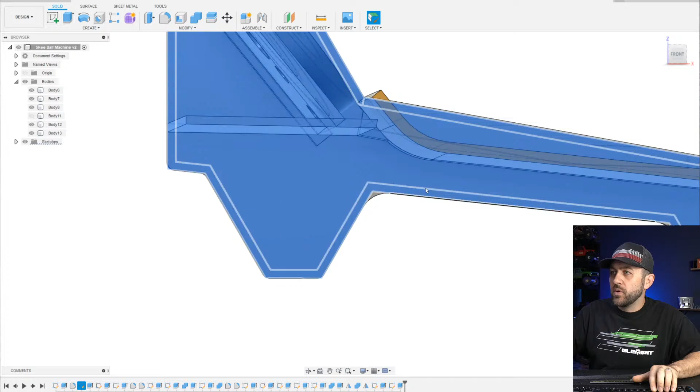So I guess in that regard, it is a little bit too high. Oh, what we could do though is technically we have that. So actually, like Colton's saying, extend it back a bit more and then move the holes up. I don't want to move the holes up too much because I think we're already kind of pushing this.

But technically, I've got that return chute at a steeper angle than anything. I could reduce that angle. Not that one, that one there.

So I have these parallel to each other right now. Let's see, where's my other parallel constraint on that? It's 8 mil, so I don't need that to be parallel.

I could have that be much flatter and save myself. Where is the constraint that's tying me up here?

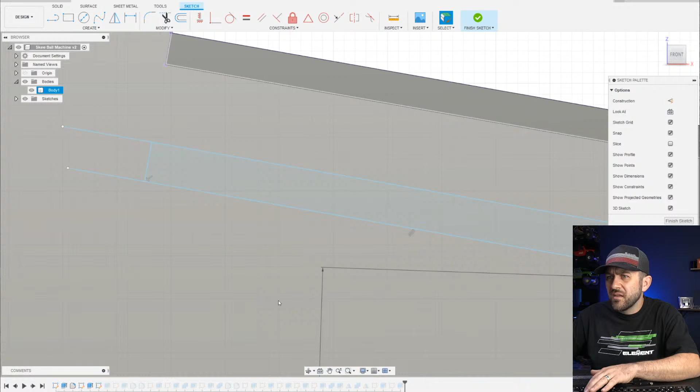Trying to figure this out. Where is it at? What is that? No. Let's see.

So I just need to make sure that these first are, yeah, 3 is fine. There we go. That did it, whatever that one was. Let's go, just go to 6.

That's gonna - we had a couple of errors in here, but let's figure out what or why they were.

That still looks fine, we extruded that. Oh, I think everything still looks somewhat okay.

Let's just make sure. Okay, I think everything, yeah, everything cleaned up there.

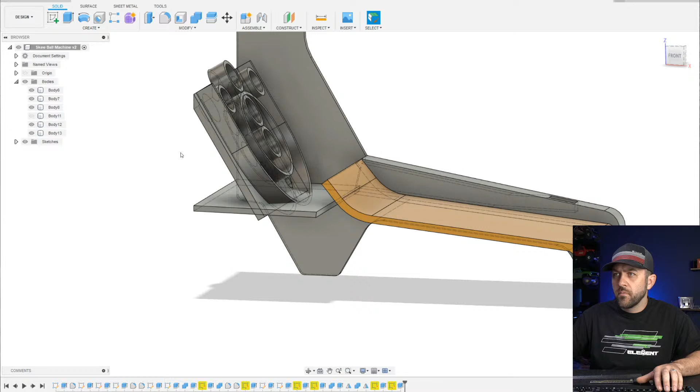Ooh. Oh, so sometimes when you make changes like that, you just lose.

What did it lose? Projects.

We had a few issues. Where are we at? Oh, I see what happened.

Okay, will a magnet ball with the bottom plate and magnet reverse polarity towards... Oh, man, possibly, but man, that's - I don't know. That seems like I'd be pushing my luck to make sure.

Okay, most of this stuff is just sketch planes that were lost. Things changed and...

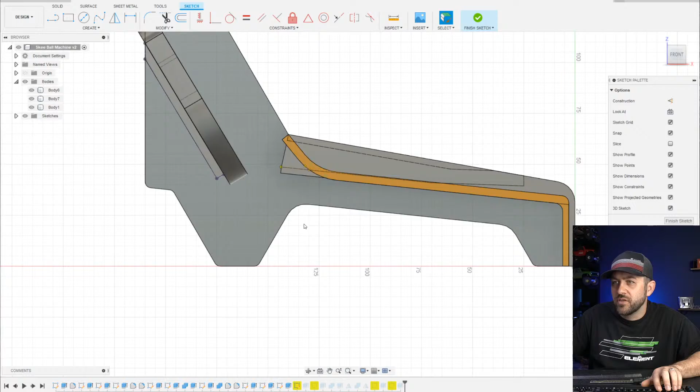That's okay, I'll be able to clean most of this stuff up. We had a couple other little things that popped up for sure. Okay, time to trash this one and start over 10 hours later.

I think adjusting that really does kind of hurt. I'm actually just undoing all of this.

That gets us back to that point. I'm going to save, do a milestone, so now I can technically revert to that.

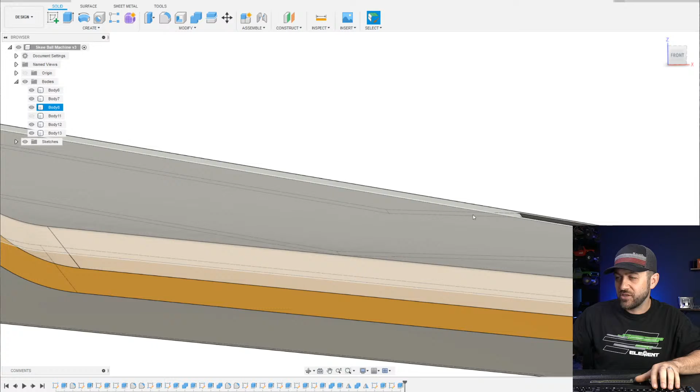Still worried the chute bottom is too tight. Does it allow the ball diameter between them? Yes, I made a cut specifically to make sure that I've got enough room in there so it always goes all the way through. There's enough room for sure there. I'm not worried about that part because I made this additional cut where you can see this hidden line, so it's 7 millimeters. The ball is 6.35, so we have enough room there. And then I'll oval this opening to make sure everything fits.

But okay, here's the option. We are at 8 o'clock now, that's 2 hours of streaming that we've done on this design.

My thought is that I can go through and finish this design on my own, get this all wrapped up, uploaded to Thingiverse, and... bottom points hole, this one here, yes.

See, it also- oh, I see, you're talking about right there. Yeah, I think we could do a simple cut there to open that up, and it'll come through. I think I see what you mean there, but that should be an easy fix.

Be sure to model a tiny hand to extract the balls from the return. Yes, I think we'll make that work. But I think that's what we're gonna do.

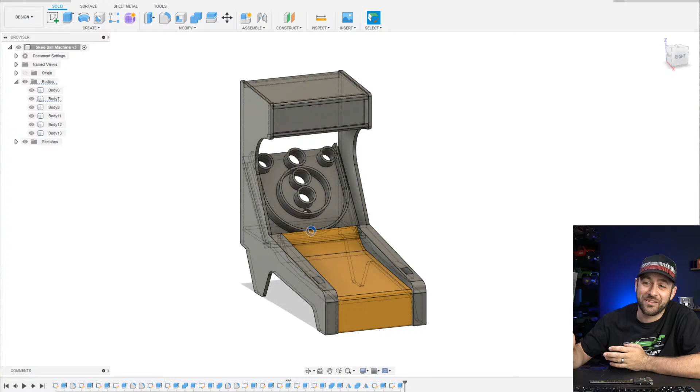I enjoy it. This one was just a fun, silly project that I thought would be kind of ridiculous to do, so why not? So I think we're gonna call it though.

I want to see more of the name tag. It's just these simple little Bluetooth or Wi-Fi enabled name tags, and you can make them say whatever you want. You just have a little Bluetooth program on your phone. And this was going to be the tailgate on my Class 3 for Scale Nationals. I had it saying Leaf Springs Suck, to be funny to Matt.

You're required to print it, Josh. It was decided. I see. Okay, I will print one even.

So yeah, anyway, that's what we're going to do. I'm going to kill this stream off for tonight. I'm going to finish drawing it though, just because I'll adjust my tolerances wherever it's needed, adjust the ball chute, make sure that this thing is functional, and then I'll get it uploaded.

So as long as nobody has any- well, even if you do have a major problem with that, it's still what we're going to do. So that's where we're at. We'll change it to our standard. I mean, it's already looking close to where we should be.

It'll be the ridiculous desk toy thing, that I just saved it, so we're good there. It'll be the ridiculous desk toy or item that nobody needed that we provided. I'll make sure and put my HD on it somewhere.